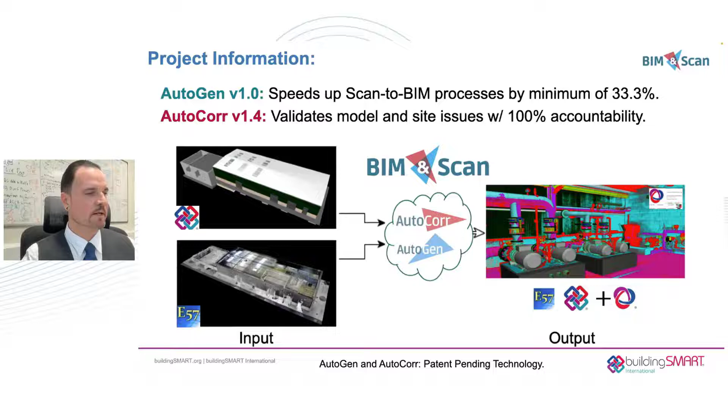So for the openBIM achievements, as I was mentioning, we have automatic low level of detail coordination model view definitions created from the point clouds automatically. We have several projects where this was worked on, and also integrating with major vendor tools as well. That's actually a social media client there, and that model was created and saved 2 weeks on an 8-week project, and maybe I can discuss more of that later. It has to do with the poured concrete columns there.

Then AutoCorr: we're taking coordination model view definitions first and foremost, because that's still unfortunately the most widely supported geometric model view definition, but also it lends itself to being properly used within the workflows because these are coordination related activities. So we take these coordination models and ordered E57 scans with scan positions, and then AutoCorr computes the difference between the two, and several results are given, which we'll discuss after. Those are many thousands of issues there from an airport, actually. I think we'll mention it again later.

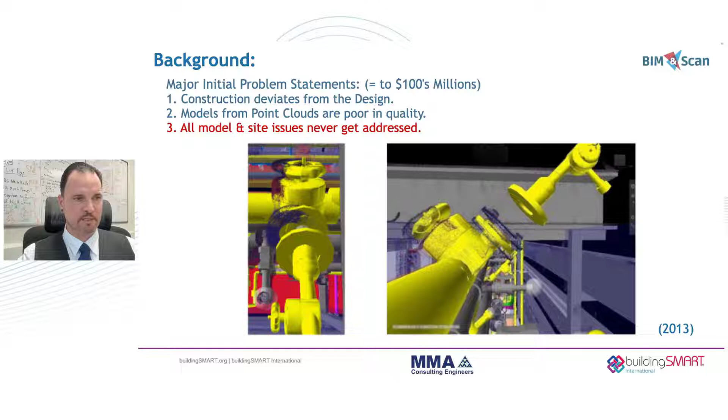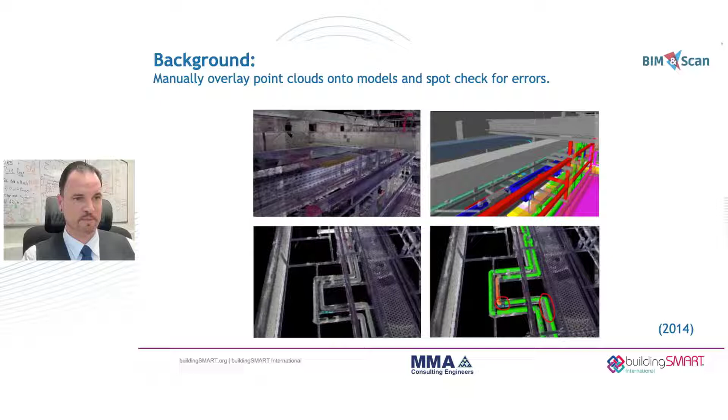As I was mentioning, manually overlaying point clouds on top of models and trying to spot check is not the way to solve these problems. In fact, when I first saw the problem, there were dozens of folks in a given area with a model and point clouds. It was actually this model here, and the point cloud was overlaid on the model, and no one could actually say how many issues they find a day, or exactly where, or whether all the issues had been fixed and by whom. So it's quite a huge problem, and this is very much common practice.

So what we learned is spot checking with traditional methods just doesn't work. So here at BIM and Scan, we want to take these subjective problems that humans aren't good at and provide an efficient, objective, and testable solution based on science and open standards.

So AutoGen's major use cases are scan to BIM development, space planning, retrofit, energy and structural analyses, and so forth. Most of this is around architectural models that are automatically generated from point clouds and the IFC spaces which are in them, which can also be leveraged for different use cases like energy analysis, and columns and so forth that can be used for structural analyses.

And then also AutoCorr, the major use cases: scan to BIM checking, site equipment install monitoring, construction monitoring, as-built BIM checking, and many other use cases we have not found yet.

So we have definitely over 400 users. I need to do another count, but it should be getting around 500. And we now are in 52 different countries. It may seem like a relatively small amount of users, but if you think about each user representing a company where there's only one of these people and one license, and they're using this on a real project, it's a substantial win for us to know that we have approximately 400 projects around the world that have used the software applications.

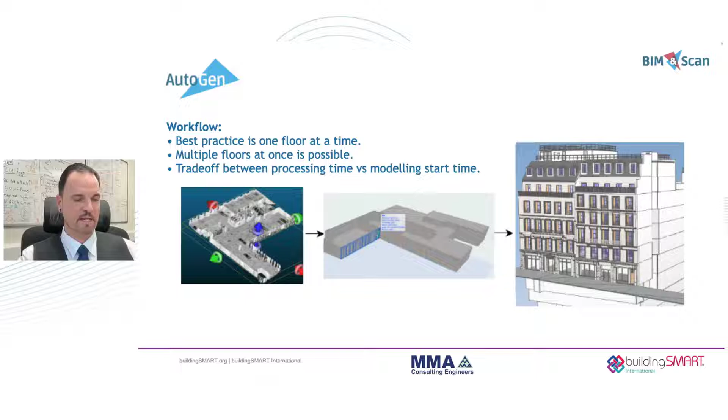So the best practice workflow is to do one floor at a time. We can compute and create more than one floor at a time, but if you look at traditional architecture and design processes and engineering drawing at its basics, its foundation is upon creating one floor at a time, just like we create a set of construction documents. So the idea and philosophy is the same way. We use one floor at a time and we build these up.

And basically the models look like this when they come out. And when you have this overlaid with the point cloud, it's a more efficient tool, and we'll see that in a moment. And updating it is relatively quick.

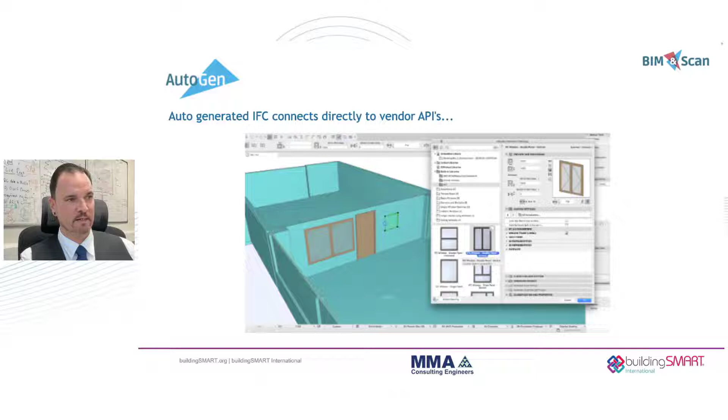All IFC compliant design applications support IFC via the API. So there's not much work except just clicking on the IFC window object in this case and selecting the right object from the library. And then away you go, creating your drawing documentation and so forth.

Here's an image showing how we use AutoCorr to check the automatically created models. And AutoCorr, one of its outputs, as you'll see, is BCF. And it shows not only can we tell you how the computation was created, within what tolerance, and what's the global unique ID and so forth, we could also give you the coordinates on how to fix the model.

And the expectation on our roadmap in the future is to automatically fix these models with our AutoDiff application. It's been published, I think, even as far back as 2016, and you can look that up yourself. So the idea is to automatically create models and iteratively loop these algorithms over them until they fix themselves to a high level and degree of quality.

And this is another image just showing where I was selecting the door and actually building the model using both of the applications, AutoGen and AutoCorr, at the same time, simultaneously. In this case, I was using ArchiCAD to amend the model.

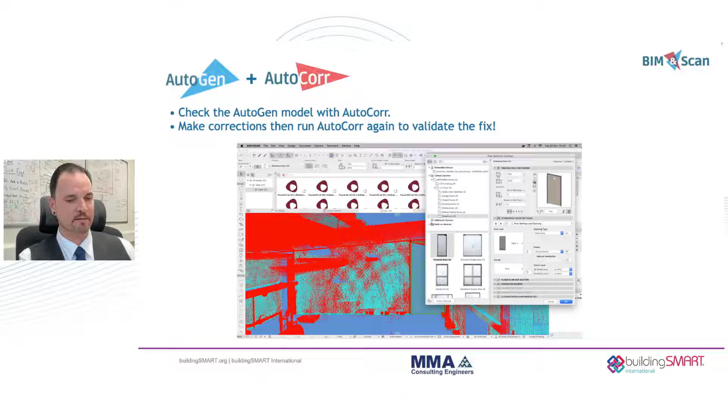This is a good use case from 2016, long ago now that I look back on it. As I mentioned earlier, saved 2 weeks on an 8-week project, so about a quarter of the time. And the reason being is we automatically generated all of these poured concrete columns that actually all settled different. The idea was we needed to have them all exact as per a contract.

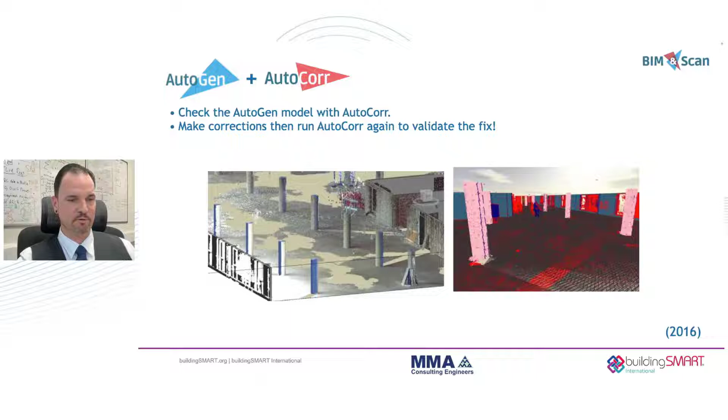And then I actually used the AutoCorr algorithm to automatically check and validate and print a report saying that all the columns were in place. And basically for this 6-story building, we had 2 weeks allowable for these structural elements.

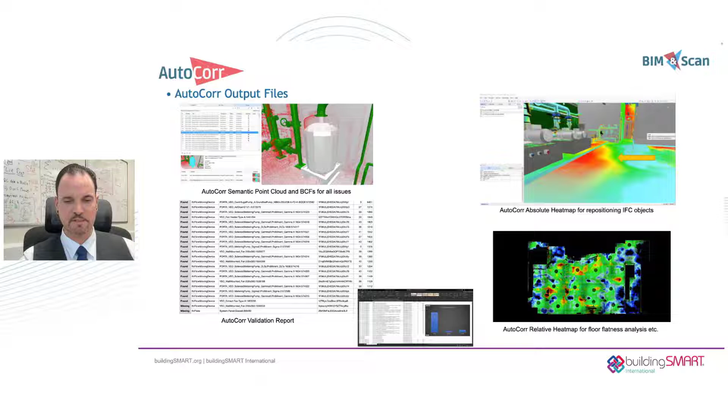So AutoCorr output files, we have the semantic point cloud, which is what happens in the computation - it checks both the model and the point cloud within a user tolerance. Different contracts have different tolerances allowable for mechanical and electrical versus structural and architectural. Basically you can input the contracted tolerance and then it finds a correspondence. So AutoCorr means auto correspondence between the point cloud and the model.

When the object is found, the point cloud then inherits the IFC semantic data. Therefore, the colors are representative of the IFC objects of which they now represent and belong to. So BCF messages are automatically created from an accountability point of view. We can now account for all objects. Earlier, I mentioned that humans are not good at this, and everyone finds a different number of problems and so forth.

This finds everything about every object, whether it was computed and found to be within tolerance or it wasn't found at all. And you'll see later a use case in Amsterdam Schiphol Airport where it's very valuable to know about objects, even if there was no correspondence between them and a point cloud. For instance, pipe work above ceiling tiles and things like this, or even within walls or components within other components.

There will be BCF messages created for every object, and it's attached, of course, to its global unique ID. We can create the reports like this fairly quickly. A value for the report is on the very right-hand side, and we could do more statistics than this, but we don't want to overwhelm the users. We have the amount of points that are associated with the object and the scan position that saw the object.

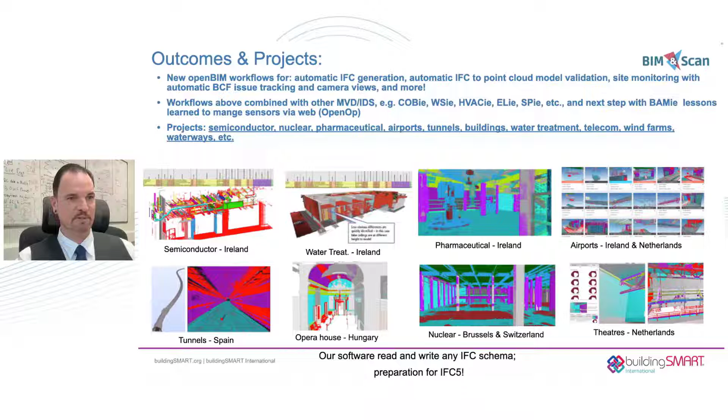Nuclear facilities, the theaters in the Netherlands. I believe Stein might be there, who participated in that one. He might even be in the room with you there.

So our new direction is Open Operations, OSS site system. Basically, it has both a mobile application and a web application. This application itself is not up for this award. I might submit it next year, but it's just showing a direction where we're using all of these lessons learned from all the great folks that have supported us at buildingSMART. We've taken so many lessons learned from Matthias and Leon and Stein and all of these folks there with you.

Basically, in a nutshell, this system is built first and foremost on business process models using IDM at a high level. And that first diagram there is showing the relationship while scheduling tasks between the web application and the mobile device. But the important part is, even at a more granular level, IDMs are made for every single data exchange within this system. We have an overall schema.

In this case, for this example, it's a new model view definition that we created for telecommunications lifecycle information exchange. Out of the overall schema, we have sub schemas for every single piece of data. And then we use those sub schemas to actually create the systems architecture. And there's not a piece of data or model or anything within the system allowable without being both verified and validated. You can look up those definitions according to ISO 9001. We don't really have the time to discuss that today.

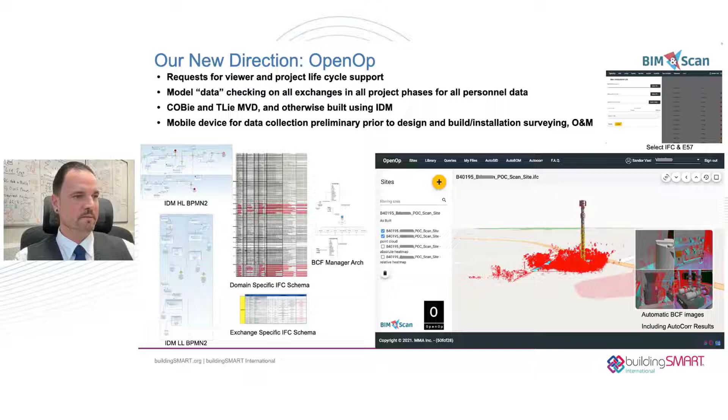One of the things we were asked is, do we have plugins for Revit and other applications? And we've started doing that, harnessing the power of the Revit API and our AutoCorr API, and integrating AutoCorr directly in the applications, and also allowing other applications to integrate with our new OpenOp solution.

And why people would want to do this is for many, many reasons. Most of the design applications are because these models need to be updated in the design applications, and that's one of the use cases. So in this case, the AutoCorr plugin for Revit allows you to select your point cloud, select your model. The computation is done in Azure Cloud, in ACI. It drops the files onto your computer, and then you can use them that way.

And we're also working on the BCF Manager capabilities with the BCF API, and how we can do the same in Revit that we're currently doing in OpenOp by creating the automatic images and things like this. So participants and contacts, some of our main use cases and folks who wanted to support us in this endeavor.

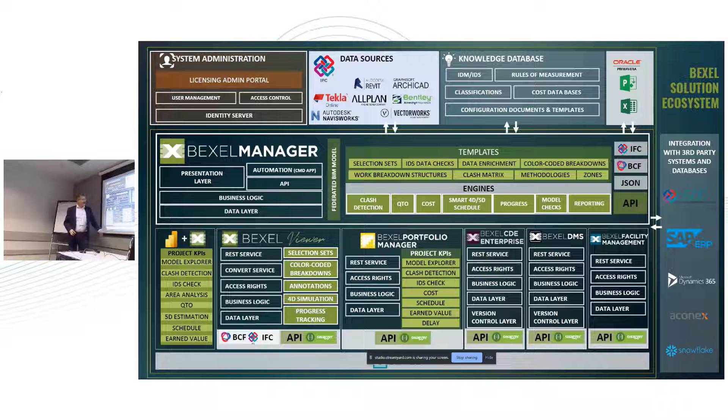And then literally automatically you can generate reports in the BEXEL viewer, a portfolio manager, or BEXEL DMS and a facility management solution incorporated. What is the key challenge of today in construction management? The thing is that if we have to do a lot of things manually, we will not do that, because we do not have time.

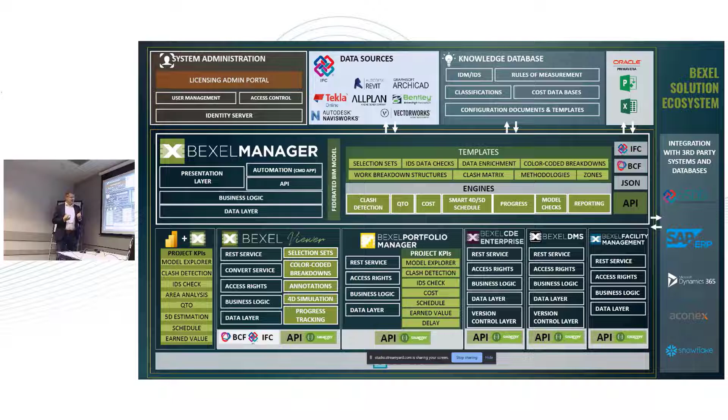Another challenge is what happens when you have the updates, and here is the process map. So you see data integration, clash detection, data verification, data enrichment. You can use also bSDD, quantity takeoffs, then selection sets or classifications, and then intelligent planning and scheduling and progress monitoring. In all this, you use mostly IFC or BCF, but with this automation, what we achieve is whenever you change something in a BIM model, it automatically updates up to 80% of your schedule or cost estimate. I don't want to say 100 because there is always something missing in IFC. But with this automation, you can have just-in-time information.

As you know, in the construction phase, if I have information today, the value is 100. If I have it in a week, it's 30. If I have it in a month, it's usually, unfortunately, 0. It's just post-fact analysis because it's too late to change something. So this is why automation is important.

And another thing is to generate a lot of data automatically. If I see how I can create manually 10,000 tasks, that's brilliant. But the key question is, will I do that? And what happens if the design is changed? Can I update this just in time? And that's what we try to answer all the time.

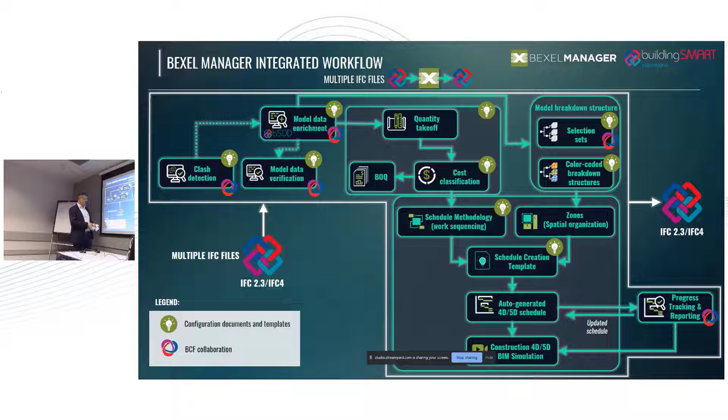So now I will explain to you just some of the processes. So in this particular project, we will have around 130,000 elements, so not too big. But we are using 61 different templates, such as clash matrix, information delivery specification, rules of measurement, scheduling methodology template, and all other templates which are very useful, bSDD templates, which are very useful for analytics.

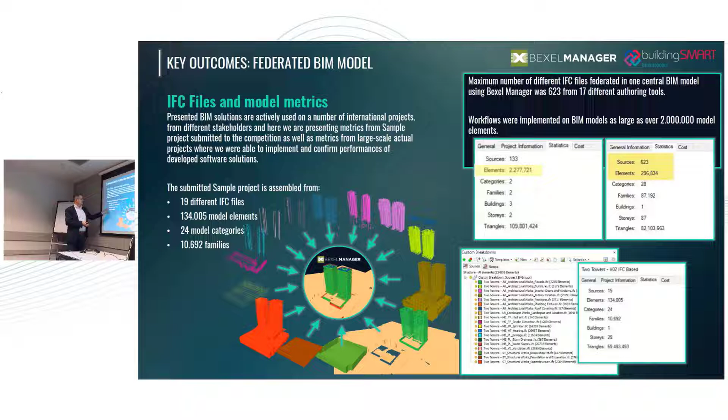So what are the basic facts? You have, in this case, 19 IFC files. This is just the project where this was demonstrated. Unfortunately, we cannot share real projects, especially when cost and estimation and earned value analysis are there. Of course, you know that data is quite sensitive, but essentially you can see this is just a basic model.

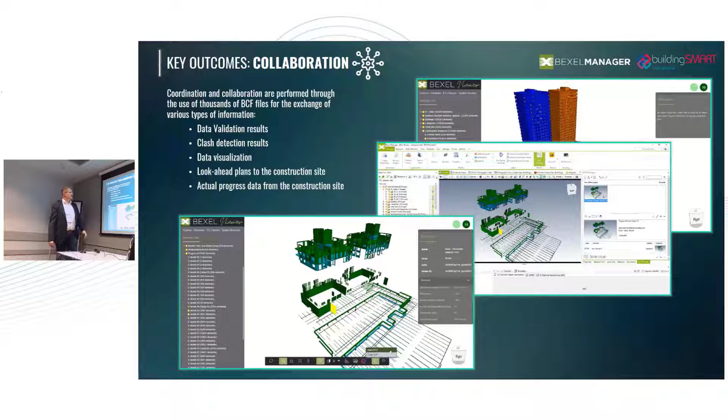Then just move further. This is how some visualization results can be seen in the cloud or in the desktop version. The basis of everything is, of course, IFC, so properties are there, relationships, and so on. And then these are all the templates we have. So in this case, you can use in BEXEL various templates. So literally all data sources are acceptable. Any API could be used.

But in this example, we usually want to say Excel is an excellent open format for data templates. So you can use JSON also, it will be shown here, it could be XML. But when you mention XML or JSON, most of the people will say, okay, I understand what you are talking about. But when you say it's very simple, just develop IDS in XML, we say, okay, what XML is. And in Excel, it's very easy to change and customize everything. So that's why, and we hope that Excel can be also used because it's open format by the others as well.

So in this case, we use selection sets, custom breakdown structures, data validation, data enrichment templates, clash matrix templates, cost classification templates, rules of measurement templates, and schedule methodology templates. So these are the templates, 61 in total have been used. So this is the basic one, data verification workflow. So just load a model, load any JSON, Excel, NatSpec, COBie, any other type.

It was interesting. BIM-Q from Thomas, for example, you can with third party easily integrate any other data check system, run automation, create automatically selection sets of the elements where the data is missing, and then produce the data in BCF, in BEXEL Viewer, dashboards, in our portfolio manager, send in IFC, in BCF, in JSON, in any other open format, in Excel at the end, because we always believe that open data must be used at the end so everybody could access and read this data.

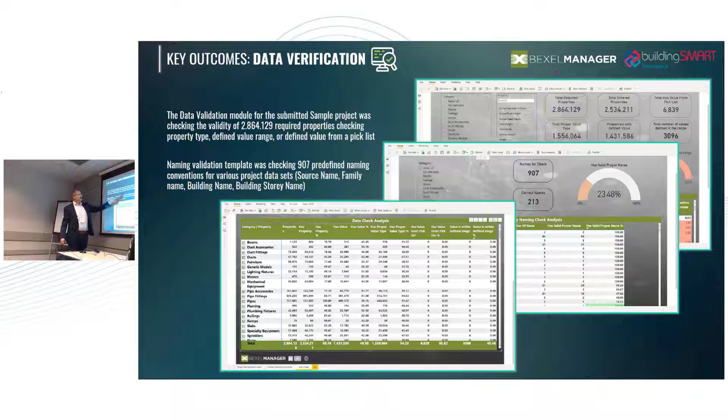We believe that dashboards reporting must also be just in time, because if I need to produce a report in a month, again, it's too late. So it needs to be accessed immediately, and that's what we achieved. So literally all these reports are directly generated. Then these are statistics, data verification, dashboard, created with just a single button. So it could be in Excel, could be in Power BI, you isolate each element. It will be shown in the video how it looks.

So next thing is data enrichment. So BEXEL has an interesting functionality. So based on a certain rule, for example, if the element is a column, if it's a bearing column, if it's concrete, it's going to be, let's say, B2010 110 code in Uniformat, or in DIN 276. So you can define the rules and use any property you have in the system and enrich data automatically. And you can use Excel for that. And what is good news, a lot of companies or clients around the world develop their own Excel templates.

What I also forgot to mention is the API. So everybody could write their own system which uses XML. It's fully open and accessible to everybody. We have different templates for this in more than 60 countries. We can also use bSDD, and it will be shown here. And again, all analytics go into all the deliverables which are necessary.

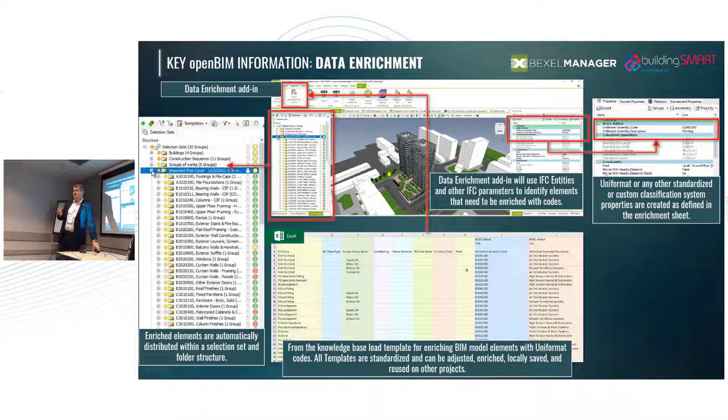So this is how the system actually adds Uniformat codes, or let's say Uniclass codes and so on, just by loading those templates. So the idea is not to put an additional burden on the contractors or the designers, but to automatically add hundreds of properties. The next use case is that BEXEL uses specific data enrichment for Eurocodes that automatically adds Eurocode based on the IFC properties.

And then BEXEL uses bSDD not just to add properties to a single element or group of elements, but to the entire project, because it reads the bSDD code from bSDD's server schema and automatically adds 20 properties for a pump, 15 for a valve, 10 for a wall, and so on.

So the idea is always what happens when we update the model. If we need to do that manually, it's good, but we are not going to do that because we are very busy with other stuff. We cannot just focus on BIM, and unfortunately, in the construction phase, a lot of projects fail because of that. So this is about bSDD.

Then clash detection. I don't want to take too much of your time, but load, smart selection sets, rules of measurement, combine them, run all clashes. Compared to some other tools, besides clearance, duplicates and hard, you have containment. So it identifies which elements belong to a certain space and automatically adds the respective IFC relationship, contained in and so on. So this is the only difference.

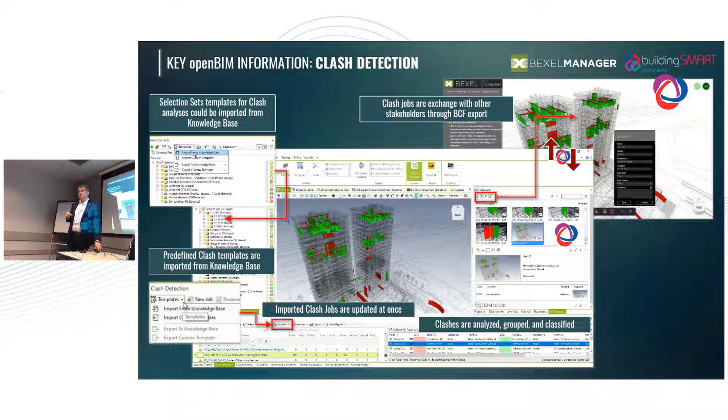Maybe just to mention that now we have a tool called Portfolio Manager, again cloud-based, which can combine all analytics on all your 300 projects. And you can see the combined total number of hard clashes at the moment in the Netherlands, for example. So this is also the idea, and the data is coming from the BIM model, not the opposite. Not just entering, okay, risk is high. To be honest, I don't like it when you just put risk is high, because I as a human decide what is high and what's not. So these are various dashboards and reports.

The next unique feature is heavily used by our clients, luckily for us. It's a BIM-based cost database. In BEXEL, you can load any industry standardized database available, but you can also automatically generate the cost structure according to any template like DIN 276, Uniclass, MasterFormat, Uniformat, and others, based on the properties you have in IFC. So again, use IFC as much as you can.

And then automatically, with formulas and rules of measurement which are defined, the system can create a cost estimate in a very professional manner. Just to give you an idea, if I have 10 types of doors in an exactly specified Uniformat category, 10 cost items are going to be automatically generated. And the rule of measurement could be count or area. But when I add 2 new types of doors, the system will automatically add those doors because it has analyzed the IFC and generated this.

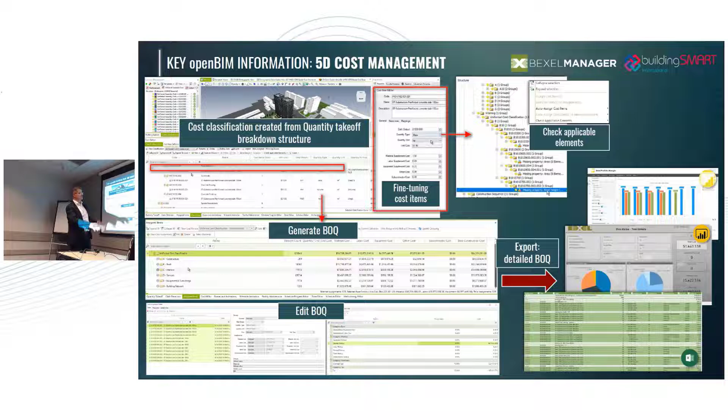So just to move further. This is now how cost is generated with all unit prices, baseline cost, additional margins, and so on. And this is how it works in IFC. So the IFC schema is fully supported.

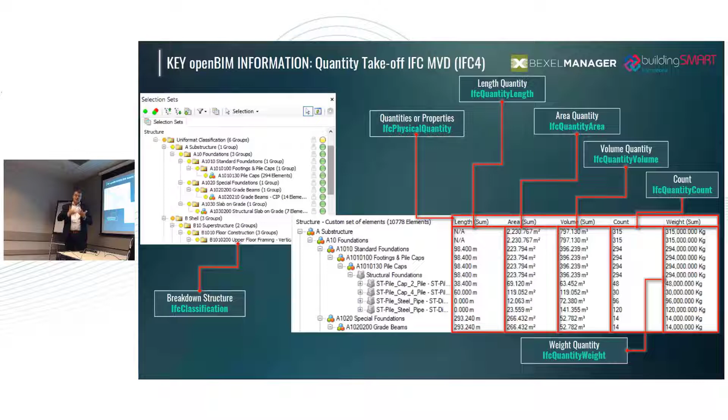By the way, I will have a presentation today together with the Vice President of the largest Midwest design-build company, Clayco, and we will talk about specifics and what we could improve in IFC in the construction stage. But this is more or less just IFC. And then cost classifications, again, in a very smart way. So now I would like to speed up.

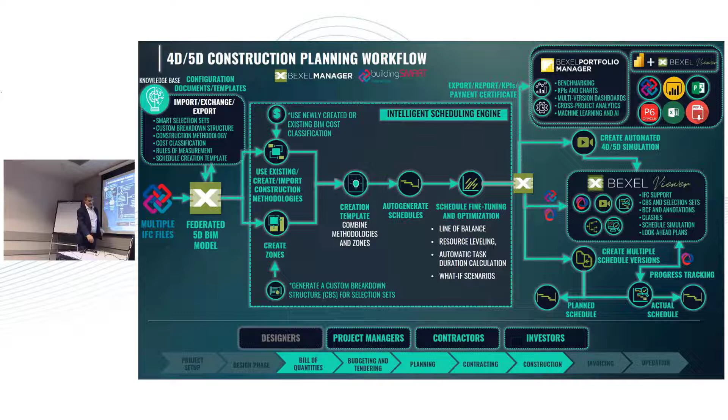BEXEL reads all the data and automatically, by a methodology which is a unique BEXEL feature we've been using for 15 years, generates the schedule. How? Because it knows that foundation or excavation must be done before facade.

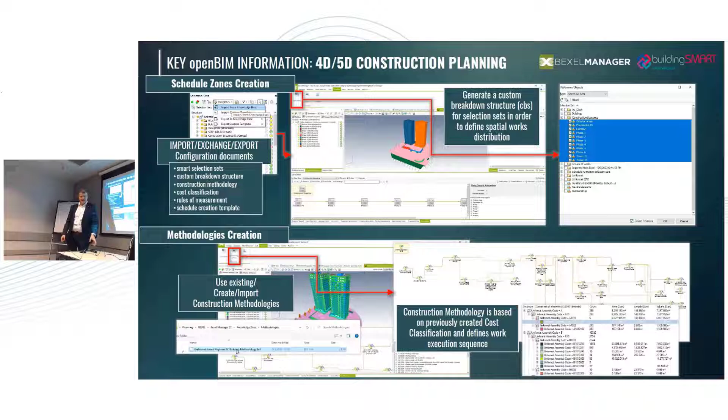This information comes from IFC. By just loading BEXEL schedule logic templates, the system automatically generates a schedule literally in a second, which is a huge time saving. Tomislav, vice president of Playco, will talk about what they identified on Microsoft data center projects when data is coming just from Primavera.

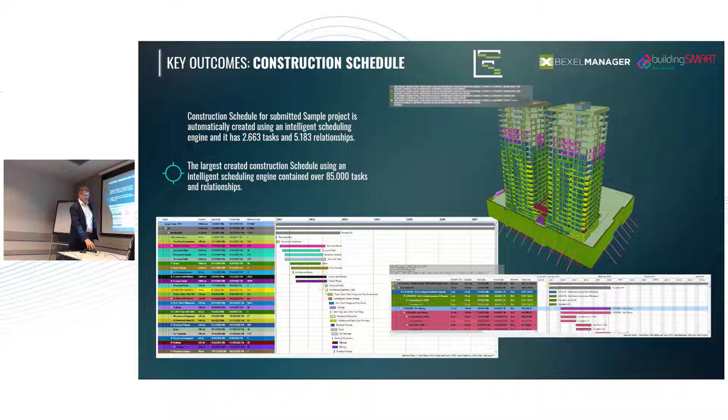Then you can see simulations, Gantt charts, but also, importantly, line of balance. Location-based scheduling is natively supported in BEXEL, and this is very important for construction planning.

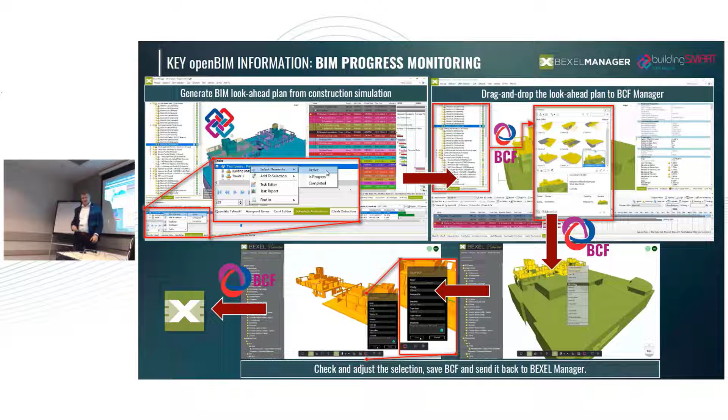Then for progress input, you send a look-ahead plan for each subcontractor or group, visually those elements to the site. Then on the BEXEL viewer, or any other application supporting BCF, you can select, fine-tune what was actually done, send it back, and see all earned value analysis. You'll see the results: planned, actual, cash flow, analytics, and so on.

So now it's time to show you the video.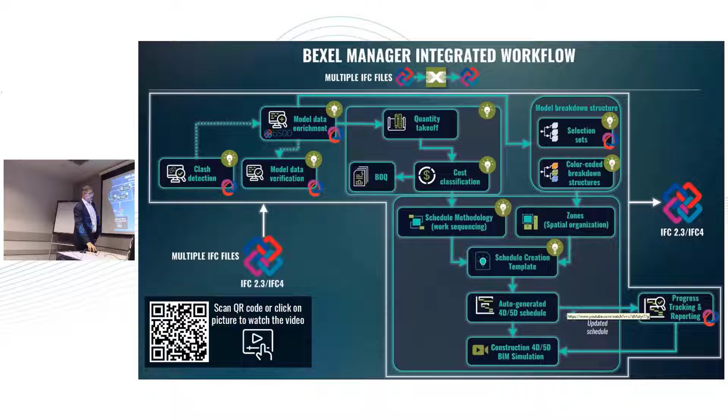Everything set here will be shortly presented, and then I just need a couple of seconds to mention some of the clients who have actually been involved in this. So this is the process map.

Now we start with basic loading of IFC files. BEXEL supports some other formats, but we like IFC most. So the IFC is loaded - 19 files, around 130,000 elements.

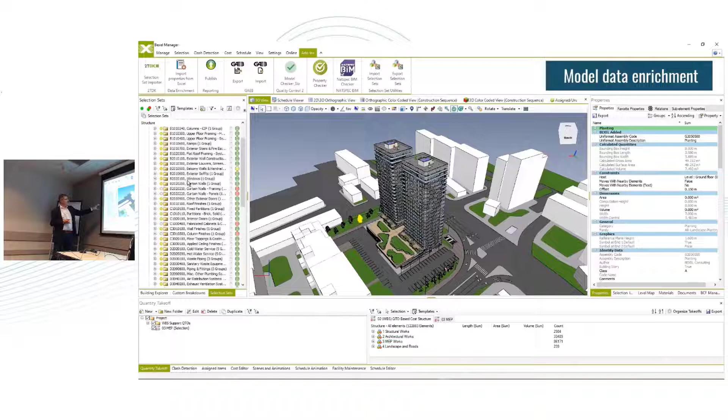So this is data enrichment. Now automatically BEXEL added 3 new properties for UniFormat data based on a small template defined here. We can always visually see all those elements - have a check, so with the color coding, if something is missing we will not see those elements there.

The next use case is how we can combine BSDD. So we are now adding the Euro codes. Again, in BEXEL everything is very easy to understand - it's not complex, it's not a closed ecosystem and so on.

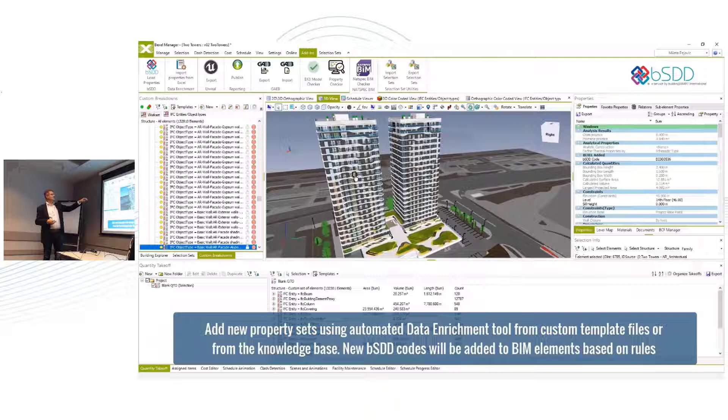Now we added Euro code automatically with a small add-in, load properties. This add-in was developed in 1 day, just to give an idea how simple it is.

You choose one type of classification, click OK, and now you'll see the system automatically added around 20 or 30 properties based on the Euro code, with data coming from BSDD. Whenever we update BSDD, the data will be automatically updated.

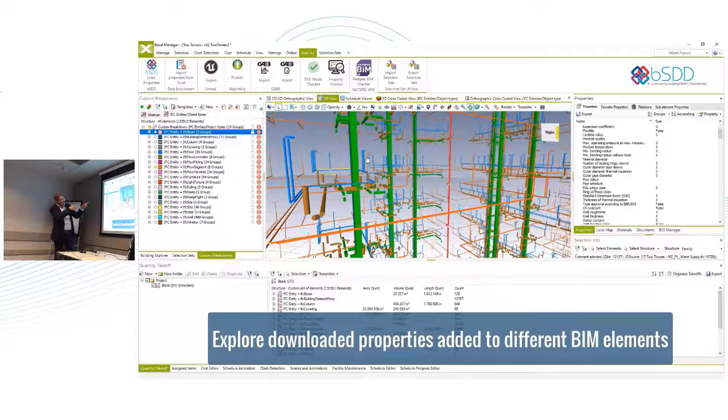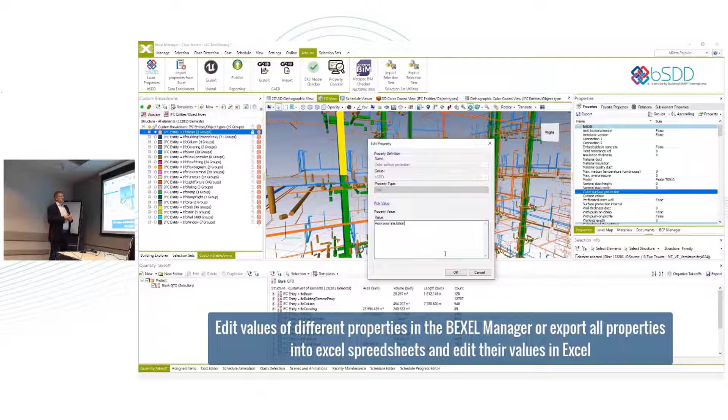And we can visually see where the beams are, where the proxies are - these are ducts. So we can see if all properties are there, if everything is recognized properly. We can always visually check the elements, and of course later change the properties, but we suggest it's done automatically - it was just shown as a case.

Next is a very simple way for clash detection. You load a sample of smart selection sets - these are rule-based, IFC-based selection sets. It creates around 30 smart selection sets.

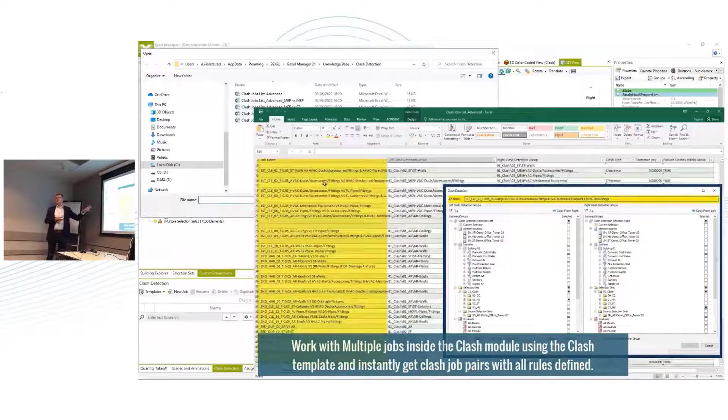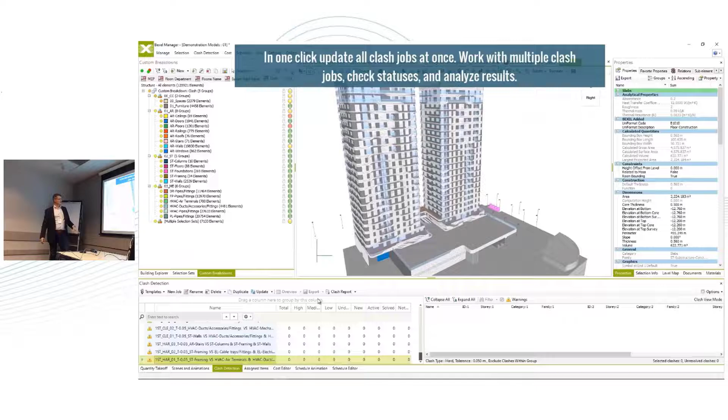We visually see what is included in walls, what are ducts, so we can check if this is okay, then load the clash matrix template from Excel. Very easy - which group of elements against which, is it clearance, is it a hard clash? Just load, you load those 37 clash jobs, click update all, and in a couple of seconds you have all the clashes.

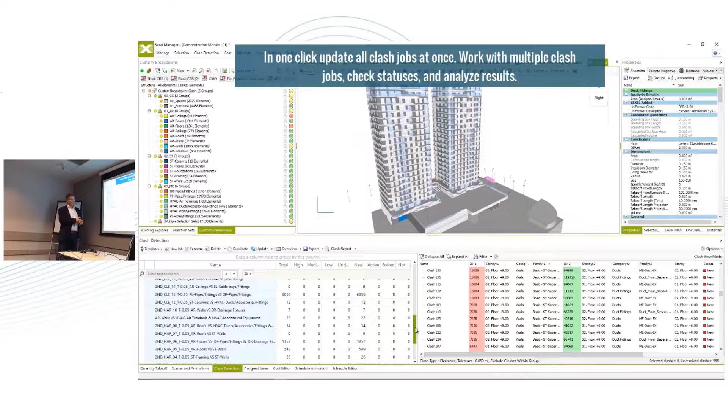Nothing special with this, but again, it's full implementation of open IFC. Now you can group those clashes, similar to other tools, and drag and drop all these clashes to BCF Manager and send to any other platform for collaboration - which is very important. This is a dashboard that does not include the viewer.

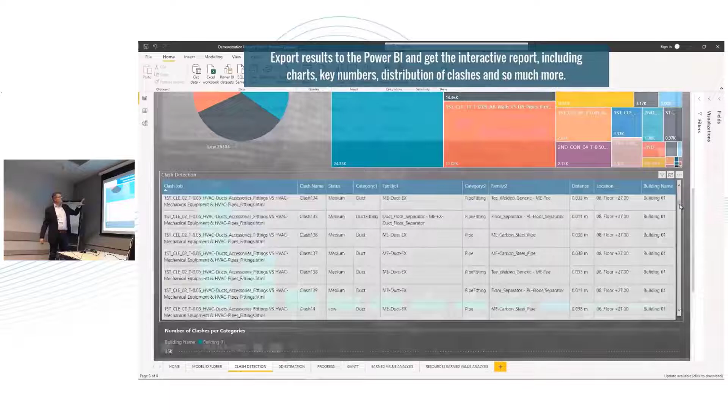You can go on our website and you'll see some examples which include also the BEXEL viewer with the dashboard. So now, the quantity takeoffs.

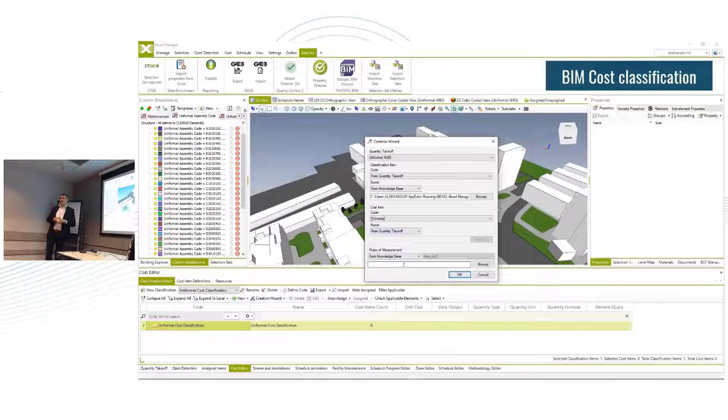Very simple way: you load the template, for example for Uniformat quantity takeoff, click OK, and now you have all quantities generated here. Unfortunately we do not have time to elaborate - it was covered in our submission. BEXEL automatically, based on the rules of measurement for a certain company or country, generates cost items from the property data for each element.

And the property data generates one or more cost items for each element. So, for example, if we have a bearing wall, it could be a formwork operation using an area formula twice. If reinforcement, kilos by weight. If concrete, cubic meters.

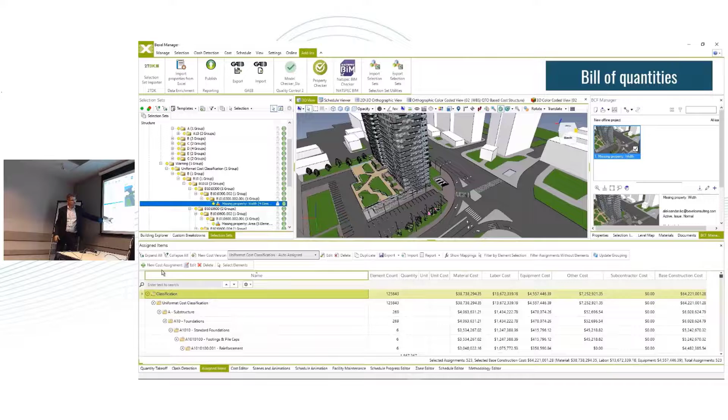And then when we have this, we can load the prices if we have them, or we can even read the prices from properties if we have, and we automatically create the cost estimate.

And this is, if you want, you can see in live how this is generated.

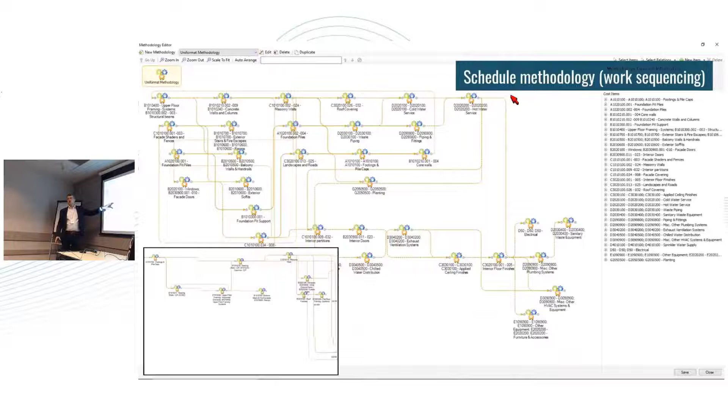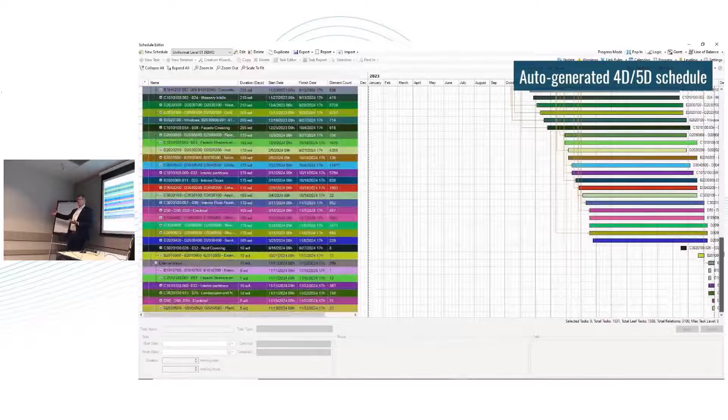And then we use this methodology. Although it looks complex, it's developed in one day. And you can reuse this methodology on all similar types of projects. Just to give you an idea, residential building versus football stadium and hospital, 85% of all items is the same.

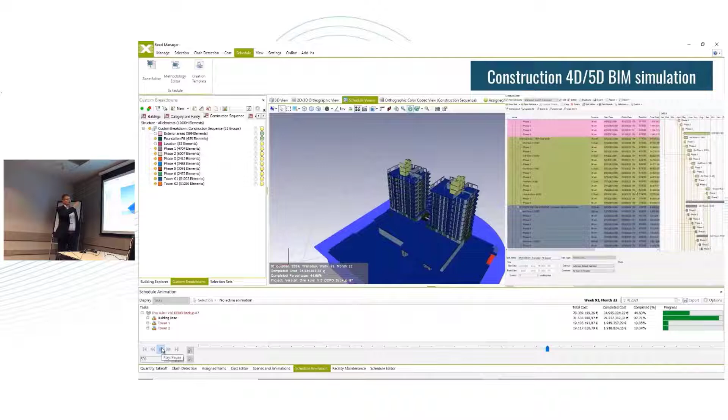This is a line of balance, so optimal schedule, it's called in Germany Taktplanung. So you see all those lines are organized in a perfect way in order to have optimal delivery, like an assembly line. And then you can see a cash flow, labor usage, visual simulation - we call this Hollywood BIM - but it's nice, but most important is where the data comes from: IFC.

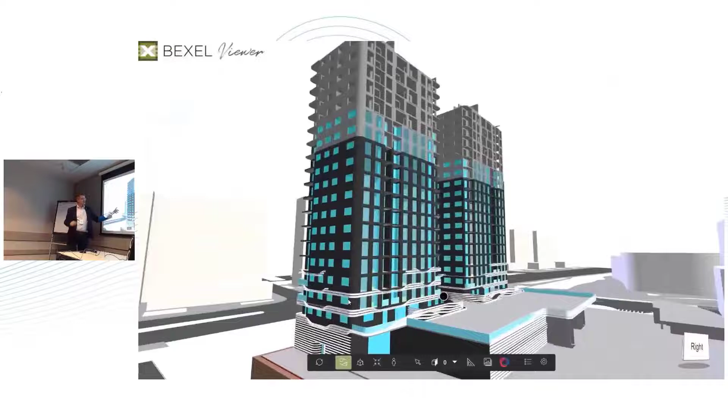So you can see how it looks like, and I will finish in a minute. So just you see how this is published. Maybe just to mention here, this is how it looks in Viewer. BEXEL can organize IFC files according to any way you have in the system.

And this is just, for example, earned value analysis when the progress is entered. So you will see, just publish this integrated with Power BI and BEXEL Viewer, and you can see a cash flow, schedule variance, cost variance, everything fully integrated.

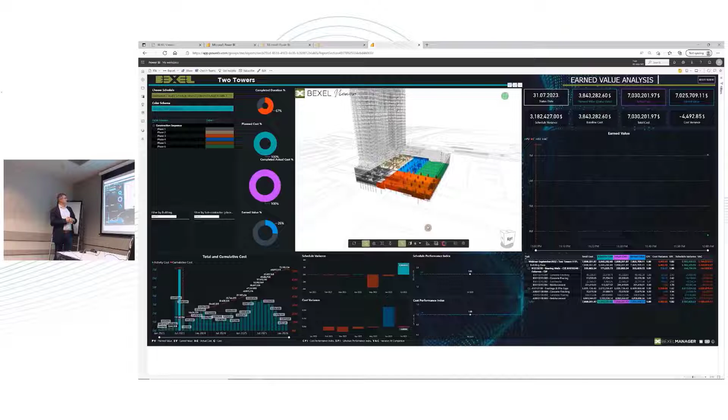So you can isolate one month, what is done. You can choose the color coding. All the data is coming from BEXEL system and BEXEL CDE.

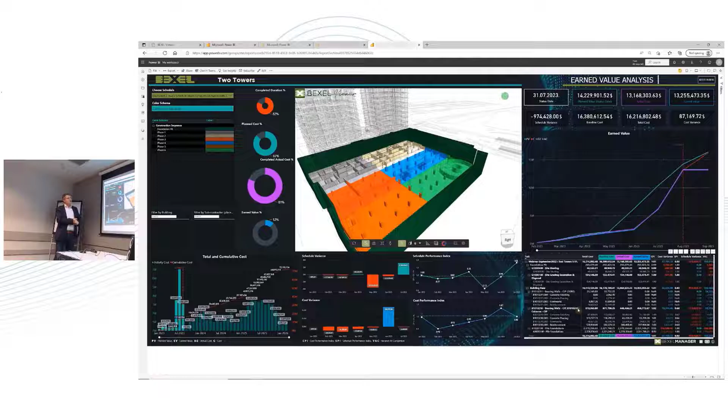So you can see what's happening in the project and instantly have results. So to do that manually usually takes a month or two months, and it's already too late.

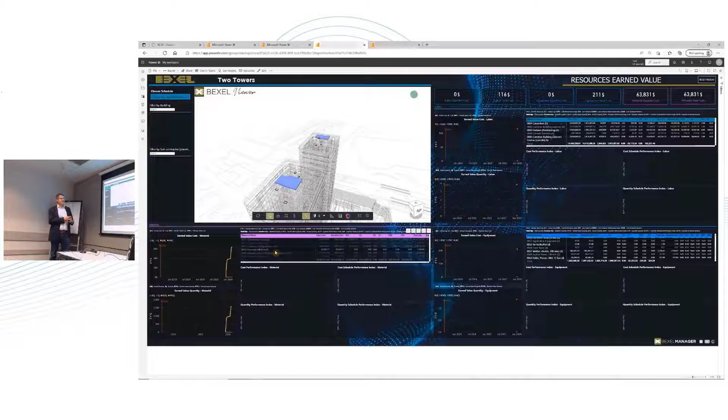So this is a resource analysis. For example, we see where carpenters are working - are they productive? What about, I don't know, dozers - are they performing well or not? So just for contractors' ability to get the most of the BIM.

Unfortunately, as you know, we still, even today, do not have too many contractors. We need to have them as well in openBIM.

And this is planned versus actual, how you combine two BEXEL viewers. So you see each month what was planned and actual. Of course, you can see with different colors the situation, what is different, and so on.

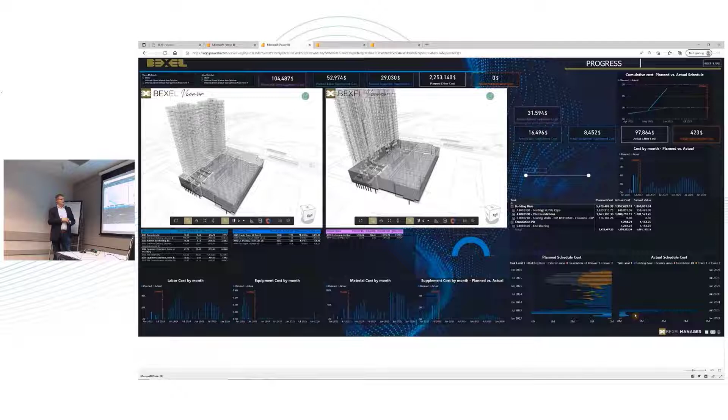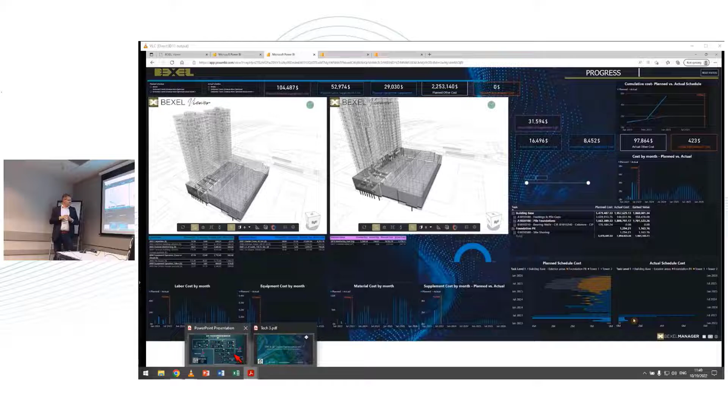Some of the clients who helped us in this submission: one is Clayco, so the Vice President and Chief Technology Officer of Clayco will join me today at 1:30 in the construction room, so we will talk an hour and a half about how this is implemented and also their strategic vision. Also Larsen & Toubro, largest Indian, but also maybe largest Asian contractor construction company. Nesma, largest or second largest Saudi Arabia company, and two companies from Europe, Archipro, largest design-build company in Serbia, and ATI Project, one of the largest designers in Milano. So they helped with those templates which are developed here.

So thank you for your attention. Thank you, Velko.

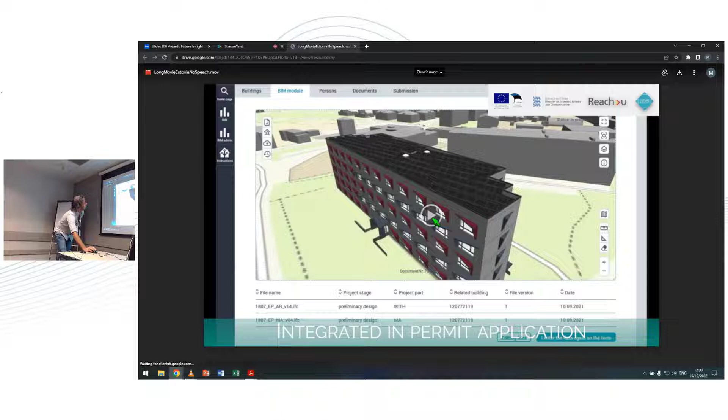So here we have a short video explaining what we've been doing. We made this at the end of the project to explain it to anyone.

Yeah, so you can imagine this. There are developers, contractors, whoever, who is already making their design in BIM. During the proof of concept, we did a survey in Estonia, and there's really a high level of BIM support. They're using it, so that's not a big issue.

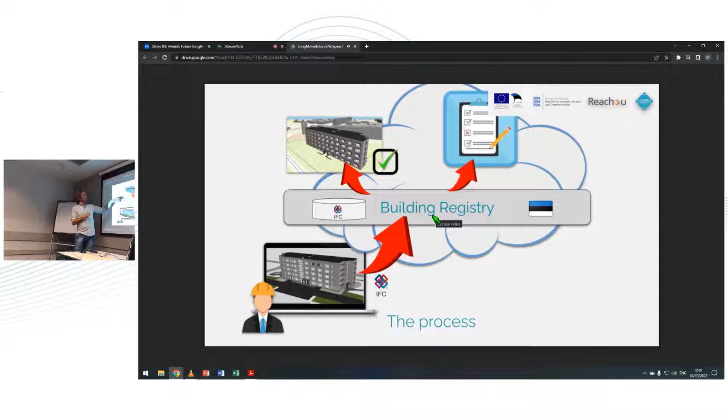...servers to automatically execute the checks, but also auto-populate the forms. One of the things we're also discussing now is, for example, to use it to build your 3D cadastre or something, because that's also something you could easily do from here.

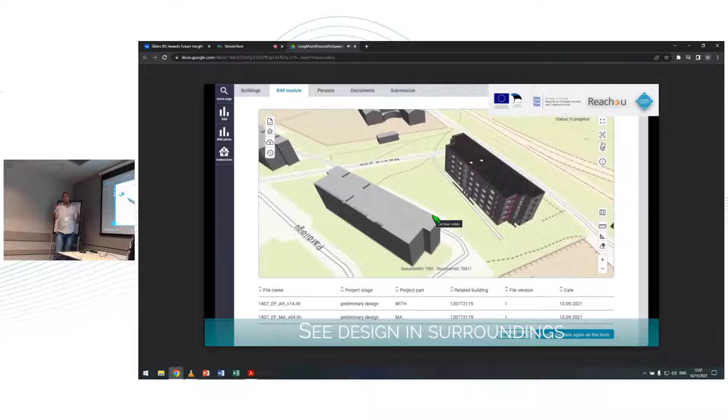So here you see the building permit application. It looks like this. And once it's relevant within the process, the application will pop up and you can see the design. So you can see it, you also see the environment, which we didn't put in there - that's just the national digital twin they have.

And we connect it using 3D tiles. So we support 3D tiles, and that way we can easily show every design in the environment, which is, of course, a really important first step to evaluate what's going on.

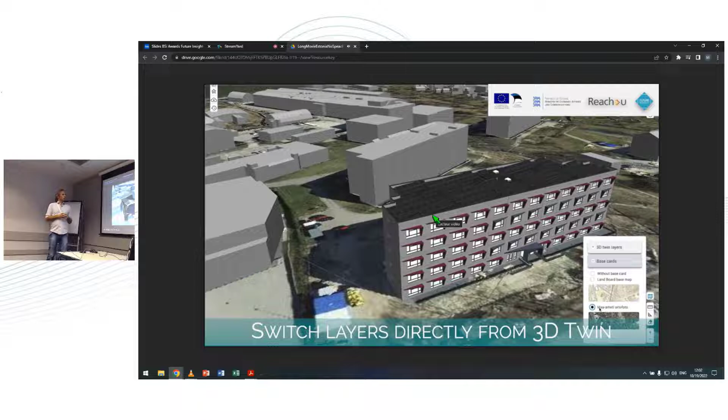We can switch between layers, 2D, 3D, whatever. And that's not something we built, but if it's there, we can use it.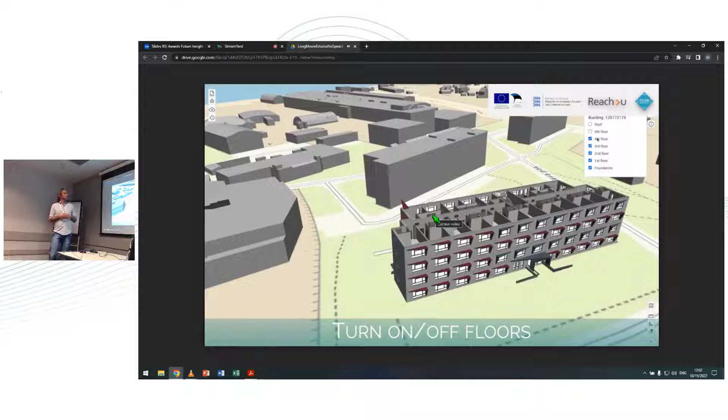Some really simple controls to turn off floors, to do some measurements. But again, as simple as possible. These people are used to Outlook and Word, so it should be really simple.

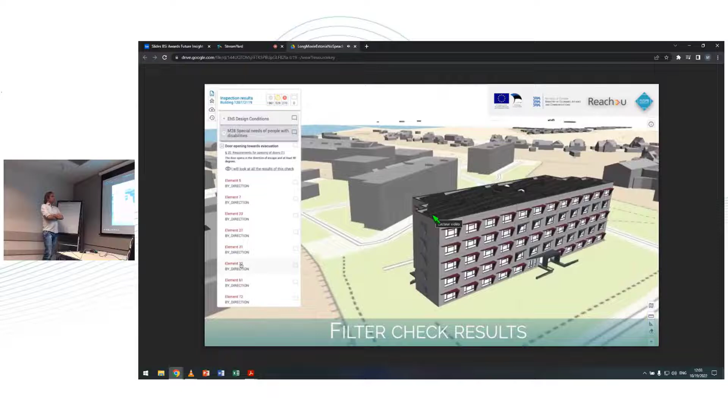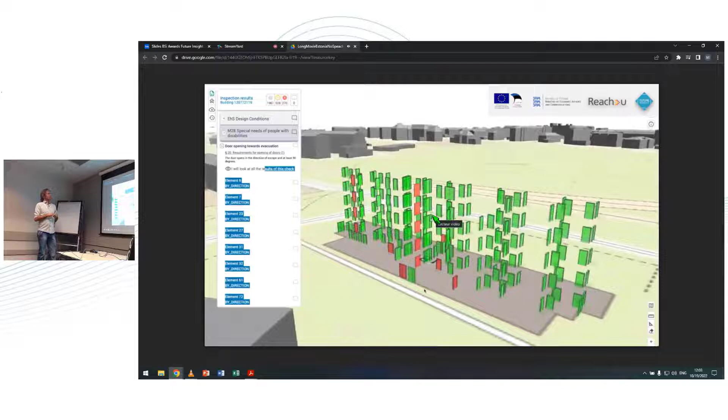And then over here you see the checks. There's a lot, there's 8 regulations which are put in there. So here is a check looking for the good direction of the doors - are they opening in the good direction depending on the escape route? And you can easily see what's good or what is not good.

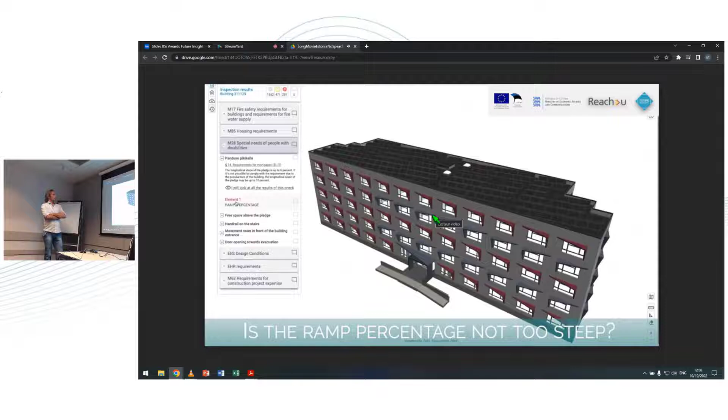Another one, you should have an entrance to the dwelling. So over here now we've added the article, and then you can see what it should be and what it is. And then in one view you can see which ones are good or not.

This is for the disabilities, and the ramp can be 10% or something - easy to check.

And now everything is still at the same place. In the future, different people will see different results.

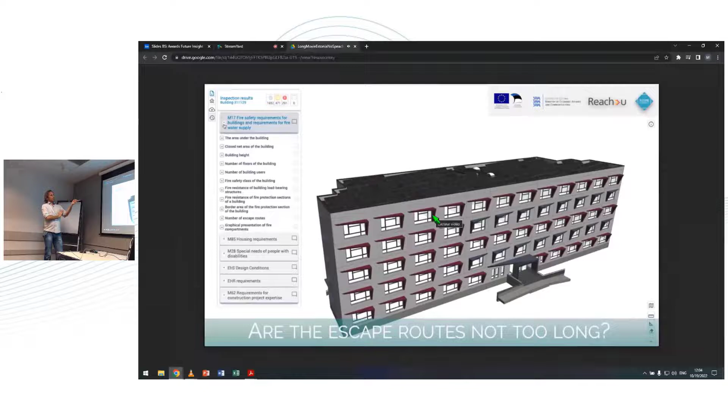Here there was a check if you could fall off the stairs, and here's a number - the escape routes should be a certain length, and you can see we've used a graph to really calculate how long the escape route is.

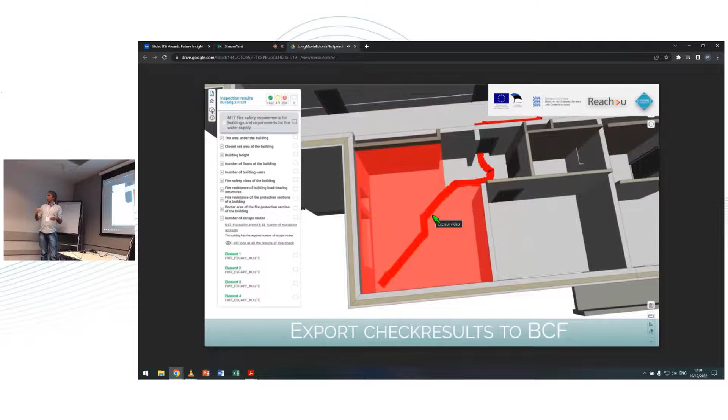In this case, it was a false negative because over here is a fire door, but it wasn't - it didn't have the right properties, so that's why the checks were going wrong. So then you go into the BIM requirements again, because you may have to make sure that stuff is in there in the proper way.

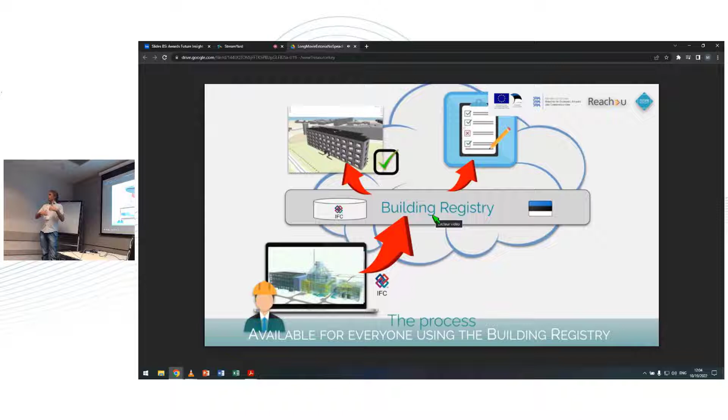In the end, you can download the results as BCF, use it in your authoring tool, update the design, and then try it again. Let me go back.

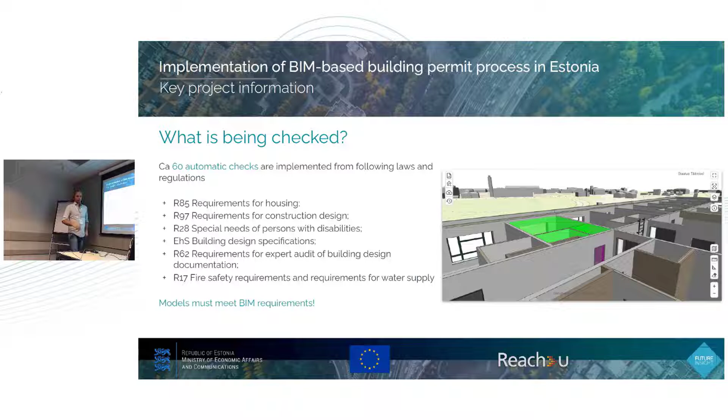The idea is that first we start with the city of Tallinn, and then it's rolled out over the entire country. But of course, you need BIM requirements, and I'll show them later. So this is how it kind of works. I showed it yesterday in the presentation as well.

We've integrated the database, which makes it much easier, faster. We can index the BIM designs, so we can also query for certain objects. And we combine it with the digital twin, and then on top of that we can build services for different applications. So we're using the buildingSMART standards, of course, but we're also using a lot of OpenGIS standards and just general web standards. And especially by combining those two things, you can really easily integrate stuff.

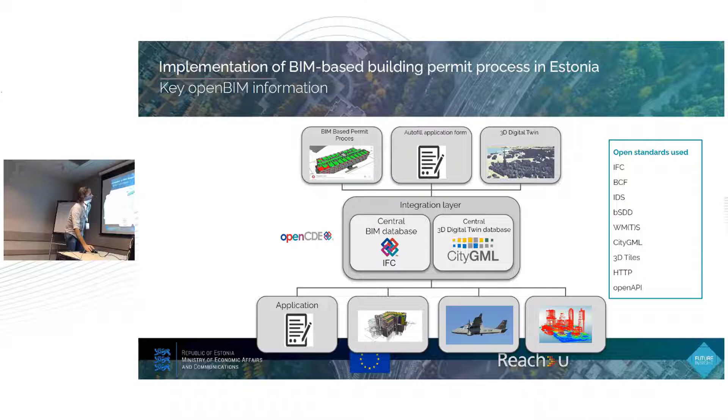And what we see is that a lot of these checks are also relying on spatial information, because it depends on where a building is how high it can be, so a lot of variables which you need to know before you can start executing the check. You need to get it from somewhere else.

And one of the parts of the project was also to set up a national BIM requirement, so not per contractor, but something like, okay, this is what we need as a government. A lot of this was already there, so we've used it, and then we've also checked what we need for the checks. And I think 90% of this stuff we didn't need; it was just already there.

And then I think we had 15 requirements which were really necessary, and half of them weren't in there. So we added some extra properties and stuff which need to be defined properly. One of them being really simple: the living room and the kitchen and all the spaces should be named properly, but there wasn't a study, for example, in this list of possible rooms.

And just a short overview. So this is a nice check. The article was, when you're living on the 4th floor or higher, you should be able to get access through an elevator. So then we need to detect the apartments, we need to detect the elevator, and we need to calculate if you can get from the room through a public area to the elevator and then get to the exit. So we are not using just rule-based checks, we're also using more complex algorithm checks, and we combine them.

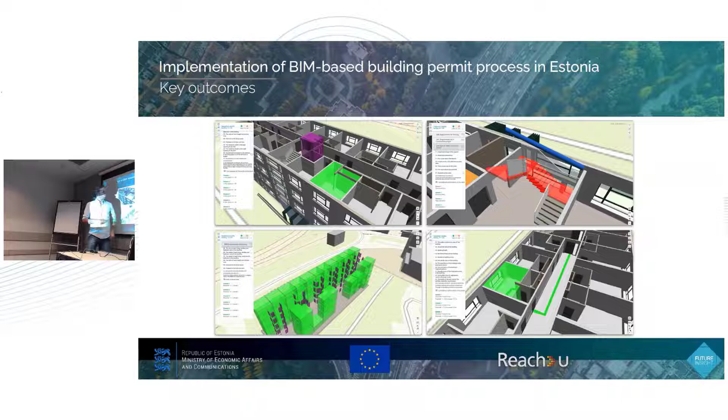And here this is the proper evacuation route with the good fire doors. You can see now it's green. And we connect to a national system where, depending on the function and the amount of people working in the building, the variables are set. So we read that out first, and then we execute the check.

Here is the image of how it should work. So there's the applicant and the permit issuer, and then there's a system. The idea is that the applicant will get access to the system. It's a service online. He can start the checks himself. So he uploads the file, and automatically all the checks are run. Then he can see the result.

Here we have some real building checks, which you just need the IFC for, but you also have a lot of area checks, so you need this combination with the digital twin. Then you get the result. You can fix it, try it again until you think, okay, now it's good enough. And then you can really file for the permit. There's an automated process, and there's also just a manual process, but you can use it within the system.

And remember, it's the first introduction for a lot of people, so it should be really simple. That's why it's easy to use online, and we really try to make the buttons specific for the users. What we see is that the stakeholders really like this way of work because it's much more transparent, faster for them. They know what's going on.

We still need a lot of additional geo information because the zoning plans weren't there, at least not good enough to use in the checks. It's often not possible, at least not in one turn, to translate the regulations into a fully automated check. So it can help, but there is still work to do also there. In Estonia, it's being kind of an agile process with the technology, with the users, and with the people setting up the regulations.

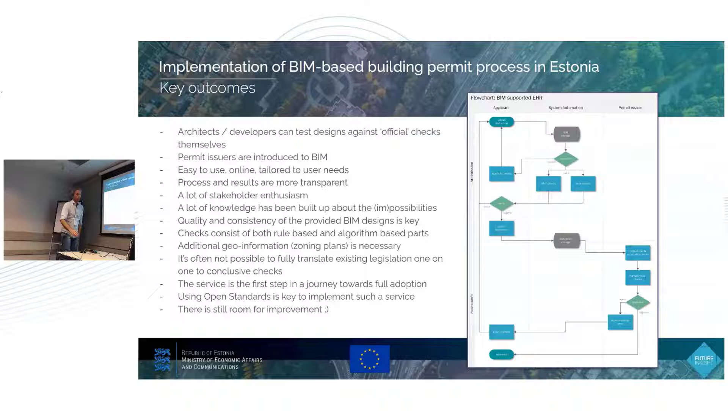It will be available early next year, I guess. And using the open standards, especially on this level, is key. You need it. You cannot use just one system. Okay, 1, 2, 3. Oh, okay, almost there. So we've built this for Estonia with Estonia now. And this is maybe a nice addition.

It's with Estonia, Finland, Germany. So from Finland, Solibri is also in there. And it would be great, of course, if in extension to the IDS and stuff, there's some kind of a standard way, because everybody's life will be much easier. The project will run the next 3 years. We just started. So we see that there's more and more people looking into this, and I've seen a lot of tools with much more possibilities yesterday and today.

I think what we're really doing is implementing it and making it usable for the other users who don't want all the buttons, just the buttons they need. So that's it. Thank you. Not just me, I want to mention Jan. He is from the ministry in Estonia.

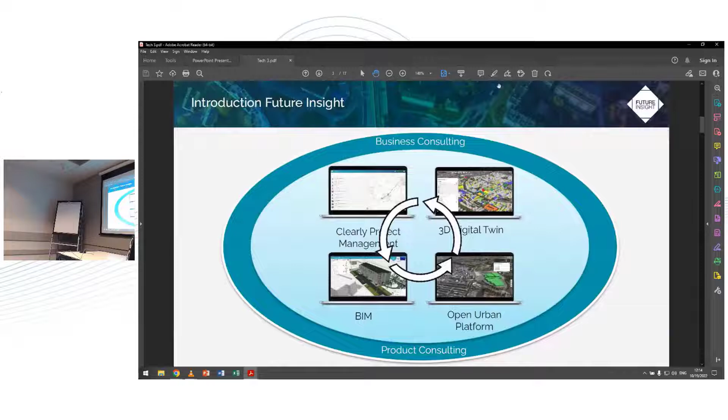Okay, so now we'll have some time for the jury to ask any questions. If the presenters would like to come up, I will just get Dr. Sean back online here. Quick, so you know that. Yes, yeah. We will now agree how to integrate our systems. We actually talked yesterday. Okay. So any questions from the jury? I'll just move the microphone forward a bit.

Yes, when you click on the issues, it automatically takes you to the component with the information about the deviation analysis and how to fix the component within the authoring tool or the design review application. And all the versions of BCF are supported, and of course the camera view works in all of those versions. Was that the question? Yeah.